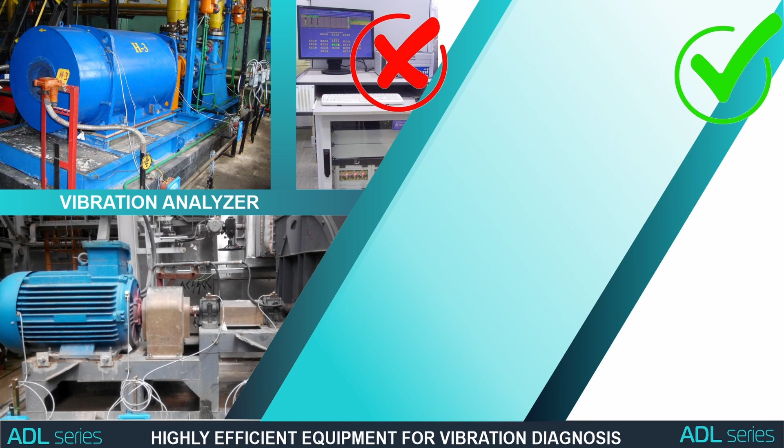The object of attention in this presentation will be the use of devices of our own production for vibration control, monitoring and diagnostics: ADLP1, ADLP3, ADLM20 and ADLM12. The presentation will help you see the effectiveness of using simple devices to check the status of all your equipment. The main criterion for assessing the correct operation of any rotating equipment is the allowable level of vibration and temperature at each individual bearing arrangement.

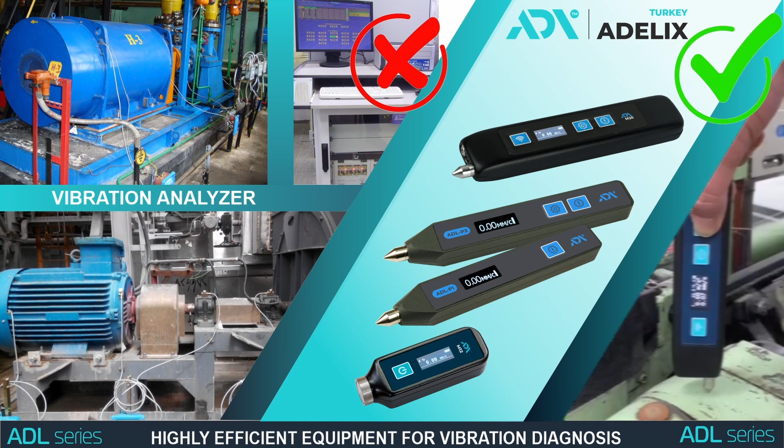In order to avoid the use of complex and expensive diagnostic procedures, it is often enough to use a simple portable device of the ADL series. Based on this, effective diagnostics is relevant and available for every enterprise. The Adelix team prepared an algorithm and a plan for implementing monitoring in enterprises. Technical support and consultations from the company will accompany you at all stages of work.

Vibration control is a technology for measuring the magnitude of the vibration of controlled objects and comparing it with the established vibration standards for these objects. In order to implement express diagnostics in your enterprise, you must do the following.

Choose the equipment on which vibration control will be performed. Select control points and vibration measurement direction. Choose a device to control vibration diagnostics: ADLP1, ADLP3, ADLM20 or ADLM12. Appoint any responsible specialist. Choose the duration and frequency of measurements. Keep a special log to record the results of diagnostics. Analyze the received data and make the necessary decisions.

The vibration control method can be common for a group of typical machines, or individual, adapted to the characteristics of a particular unit. The control points and directions for measuring the vibration of the pumping unit are selected on bearings. The direction of measurement is in the axial, horizontal and vertical planes.

There are several ways to attach the sensor to the object being monitored: on a stud, on a magnet, or using a probe. In this case, it is necessary to observe the main condition, so that the measurement range is no more than 1/3 of the resonant frequency.

The main field of application of the devices is the operational control of the mechanical condition during operation, diagnostics, maintenance and repair of equipment: bearings, gears, turbines, generators, fans, pumps, rotors, distribution plants, ball mills, rolling mills, gearboxes, conveyors, engines, blowers and many other equipment.

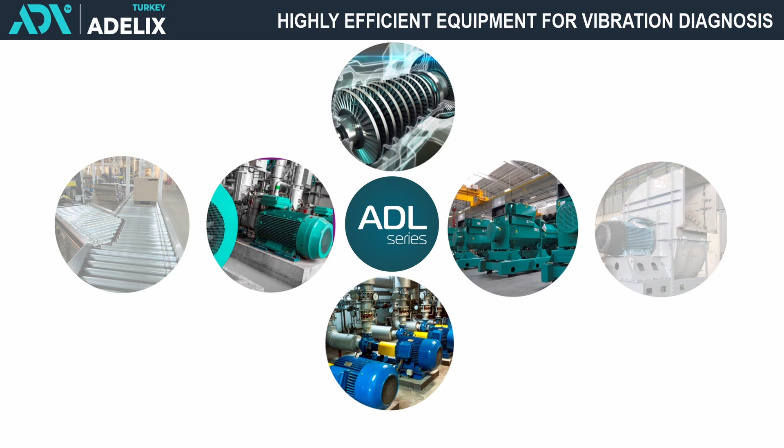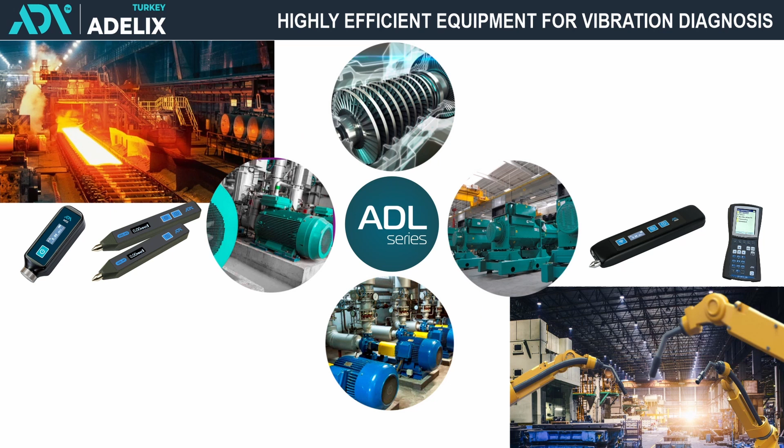Applicable for monitoring both entire structures and individual elements. Vibrometers of the ADL series are used in metallurgy, mechanical engineering, petrochemical, as well as light and defense industries, thermal and nuclear energy, in the maintenance of equipment of agricultural complexes, housing and communal services and transport.

Let's consider an example of vibration control of a centrifugal pump, which is used to pump a large amount of water from storage facilities to consumers. After selecting the equipment on which vibration control will be performed, we select the necessary portable device, control points and directions of vibration measurements, as well as the duration and frequency of measurements.

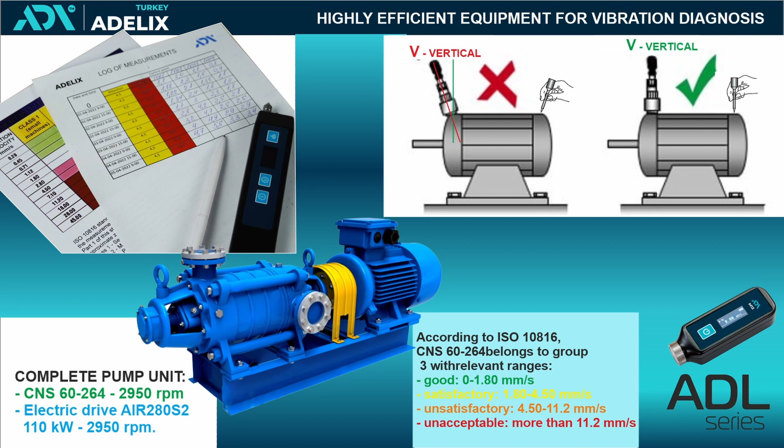The measurement must be carried out strictly perpendicular to the measured surface. There are 3 axes for measurement: vertical, horizontal and axial - V, H and A. You can choose one of the most informative axes, on which the vibration value will be maximum. In this case, these are the points.

V1: vibration control on one horizontal motor bearing. V2: vibration control on the second horizontal motor bearing. V3: vibration control on one horizontal pump bearing. V4: vibration control on the second horizontal pump bearing.

Next, you need to fill in the data in the monitoring log. After that, with a given frequency, carry out diagnostics, both for control and for a set of statistical data. After a certain time, it is required to analyze the received data and make the necessary decisions.

According to the International Organization for Standardization, you can define the ratio of equipment to its class and limit values for the condition of the equipment. Before determining the equipment class, it is necessary to establish on what type of foundation it is installed. Equipment can be installed either rigidly or loosely on the foundation.

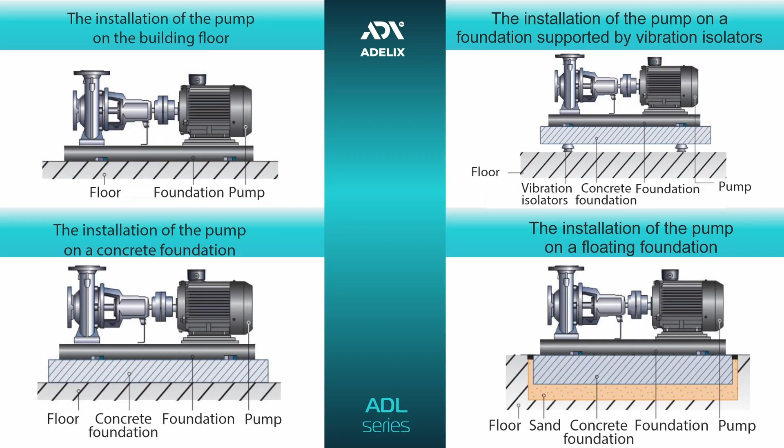As seen on the slide, on the left we have a depiction of rigid installation on the building floor in a concrete base. On the right, we have equipment mounted on vibration isolators in a soft foundation. Let's take a closer look at the rigid installation of equipment on a foundation.

In this case, if the equipment is powerful and is mounted on a rigid foundation, it will be classified as Class 3 equipment according to ISO 10816.

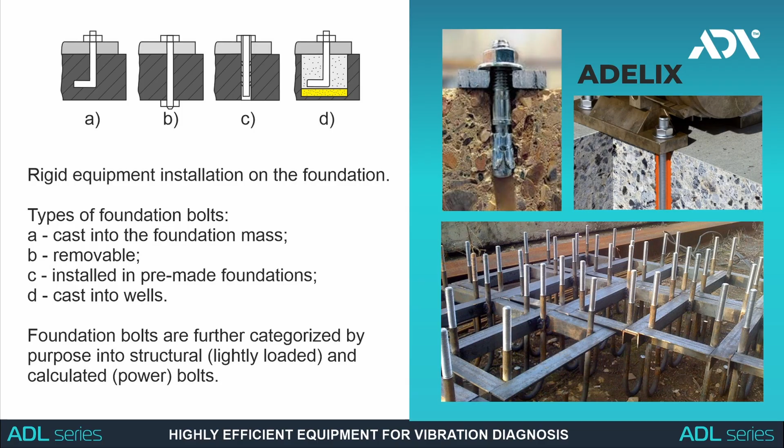When installing modern equipment, various vibration isolation supports are commonly used, and the equipment is installed on a non-rigid foundation. This allows for reducing the impact of vibration on the foundation, minimizing the influence of neighboring equipment, and dampening oscillatory processes within the equipment itself.

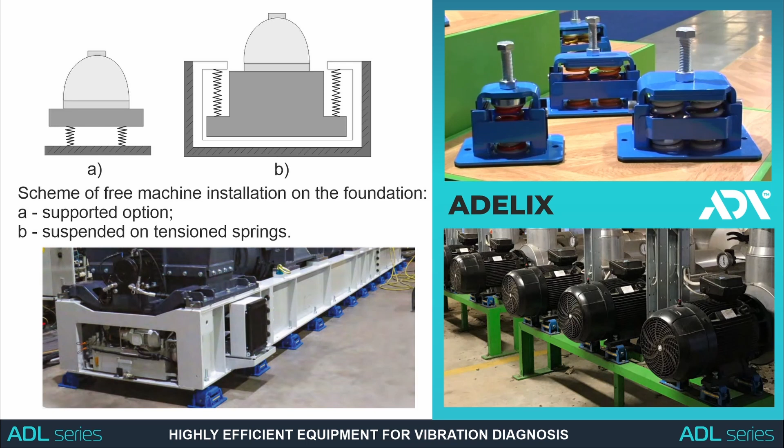In this case, if the equipment is powerful and installed on a flexible, non-rigid foundation, it will be classified as Equipment Class 4 in accordance with ISO 10816.

One of the key parameters in selecting vibration standards is the motor power. Based on the power, we classify it into the first, second, third, or fourth classes, taking into account the rigidity of its installation on the foundation.

Manufacturers of electric motors indicate this information on a nameplate attached to the housing of the electric motor or drive. Sometimes manufacturers also include the equipment class on this nameplate with reference to vibration standards according to ISO 10816. Vibration standards for rotating machinery are determined by a standard.

According to ISO, all machines are classified into one of 4 zones based on their vibration levels: A, B, C, D. Zone A: new machines just put into operation.

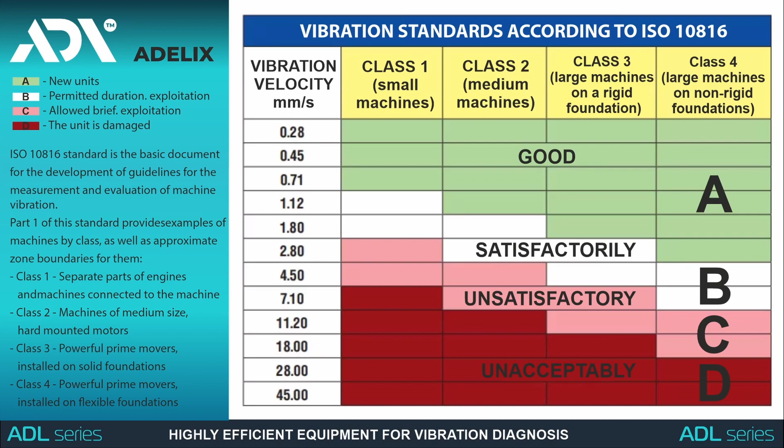Zone B: machines suitable for continued operation without time restrictions. Zone C: machines not suitable for extended continuous operation. Zone D: vibration levels in this zone are typically regarded as quite severe and can potentially lead to machine damage.

The personnel who made the measurements should report the increase in vibration to the repair service as soon as possible in order to make a decision on further operation.

For efficient and fast diagnostics of equipment, we present a series of devices from the general line of vibrometers: ADLP1 to measure the root mean square value of vibration velocity, and ADLP3 to measure 3 vibration indicators: vibration velocity, vibration displacement and vibration acceleration, as well as for express diagnostics of rolling bearings by peak characteristics.

These are the simplest and most accurate devices with which you can improve the safety and reliability of equipment at the enterprise, carry out maintenance and repair according to technical condition, plan systematic control measures, while involving only certain technical personnel.

The Universal Vibration Meter ADLM20 allows you to easily measure 3 vibration parameters: vibration velocity, vibration acceleration, vibration displacement. In addition, the ADLM20 vibrometer has a non-contact temperature measurement function.

The ADLM12 vibrometer is a simple and easy-to-use diagnostic tool for monitoring vibration. Designed for monitoring, diagnostics, control and solving problems related to the vibration state of various industrial equipment.

A unique feature of the vibrometer is the ability to view data in real time on the device itself and using the built-in Bluetooth function, which connects to a special application installed on a tablet, smartphone or laptop.

The ability to connect the device to various devices turns this miniature and inexpensive device into a full-fledged vibration analyzer that allows you to measure according to 3 vibration parameters: vibration velocity, vibration acceleration, vibration displacement.

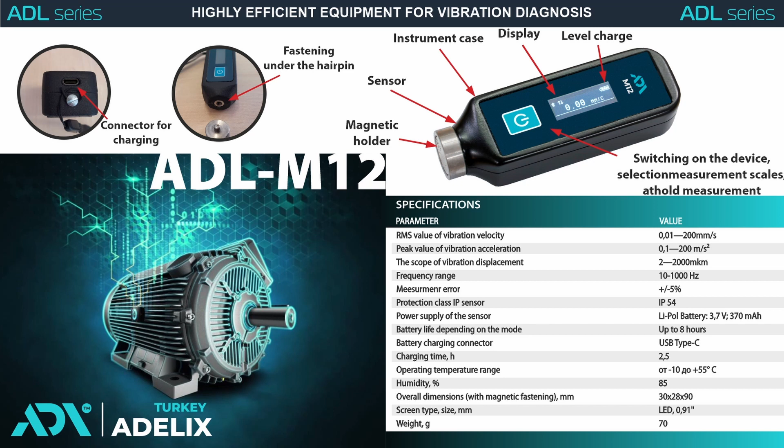It will allow diagnosing rolling bearings by peak factor, as well as determining the spectral composition of the vibration signal using specialized software. Monitor the units and identify the cause of the unstable operation of the equipment.

The introduction of effective and simple devices for vibration diagnostics will allow significantly increasing the reliability and service life of equipment, eliminate the risk of emergencies and ensure the uninterrupted operation of the enterprise.

Timely detect an increased level of vibration. Increase profits by reducing the cost of unforeseen repairs and downtime. Increase the level of safety of the company and personnel.

Increase production efficiency. With the accurate and reliable ADL series of portable technical diagnostic instruments, you can always be sure that the equipment in your production is working efficiently.